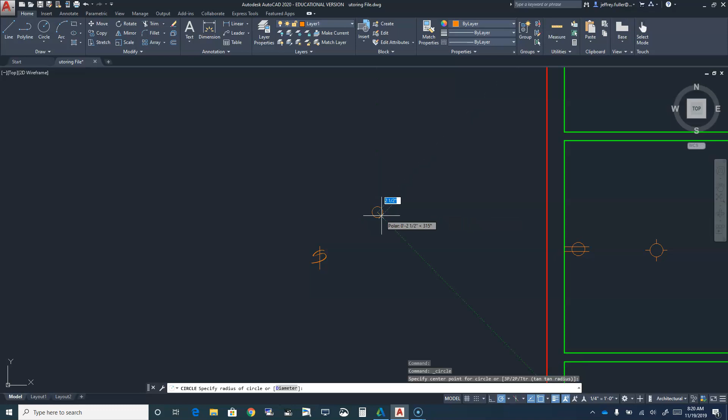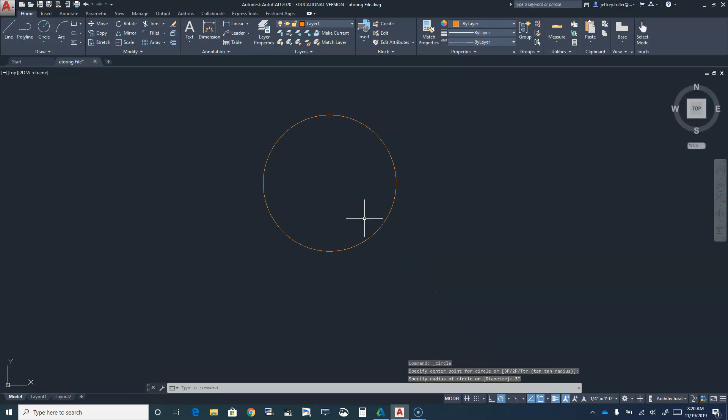So in order to do that, we draw a 6-inch circle in AutoCAD here. If I go to the circle tool and then click somewhere, as I'm drawing it out, let me zoom into it, it's measuring from the center, which means what I'm actually getting measurement-wise is a radius. So in order to make this a 6-inch circle, I just need to enter 3 inches for my radius, and then there's my 6-inch circle.

And then for the lines you see that I've put around this one, to represent just a plain old surface mount light fixture, first off I want to be consistent with the line lengths. I don't want to have some lines longer and some lines shorter.

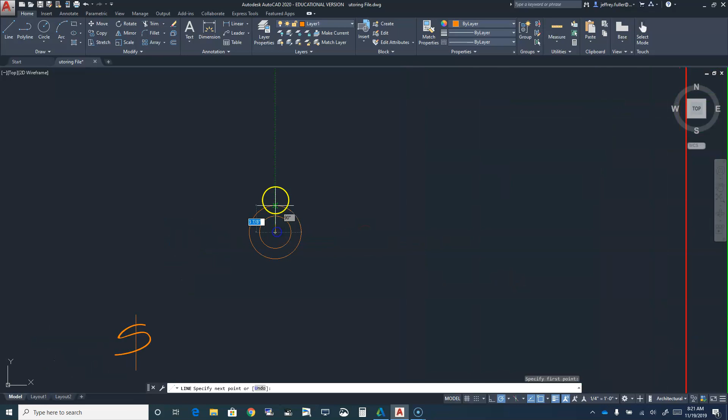So what I'll do is I'll offset this primary circle 2 inches to the outside, just like that. And then I'm going to go to the line tool, and find the center of that circle. I'm just going to draw some lines, and I don't have to draw these any certain length.

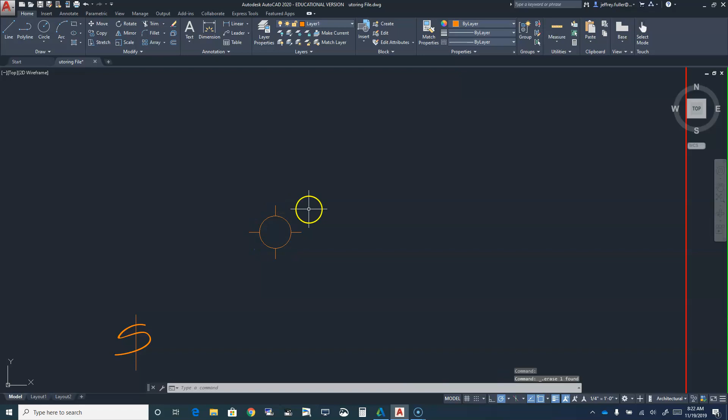Now all I have to do is trim all the excess. So I'll trim out the inside, and then I'll trim out the outsides. And then I'll select this outer circle and delete it. So now I have a light fixture with everything, all the lines are equal. And that's the big thing with these symbols, is consistency across your entire drawing.

Now for the receptacles, I did the same thing. I just created a 6-inch circle, and on this one let's go ahead and make a circle real quick here. So I find the center, and then I draw the lines a little bit longer out one side than the other side, kind of like this. This is probably a little bit too long, but that's okay. Just make sure again that you're consistent with all of your receptacles.

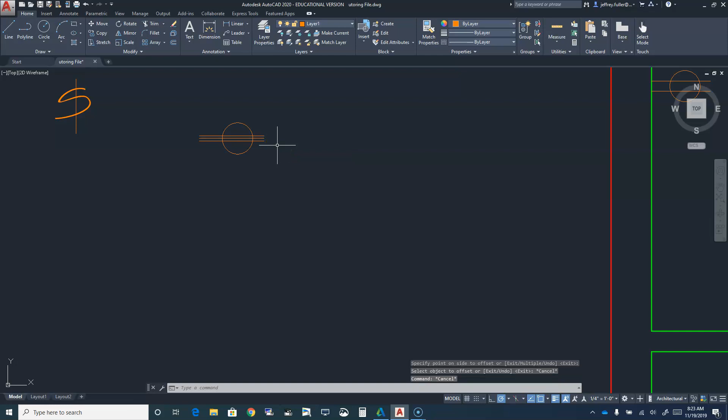Now what I'm going to do is offset this line in both directions. So I'm going to click on offset, and offset it 1/2 inch. And then I'm going to delete the center line. Try that again. And I have a receptacle.

Of course, this one right here, I think I got them a little bit closer than I did on this one. I think I did 1 inch offset on this one, so it might be a little bit better to do 1 inch offset. The thing is, again, it's just consistency across the board.

Alright, the next one is this letter. It's a letter S, it's a light switch, letter S with a line drawn through the middle of it. To create that one, we have to go in and play with our text tool. Watch very carefully as I do this.

So I click on annotation and go here where it says annotative, because I'm going to change my lines or my letters to annotative, and I'm going to click on manage text styles. Now once I'm in here, annotative should be highlighted. If it's not highlighted, go ahead and highlight it again and click set current, to set that as the current text that you're using.

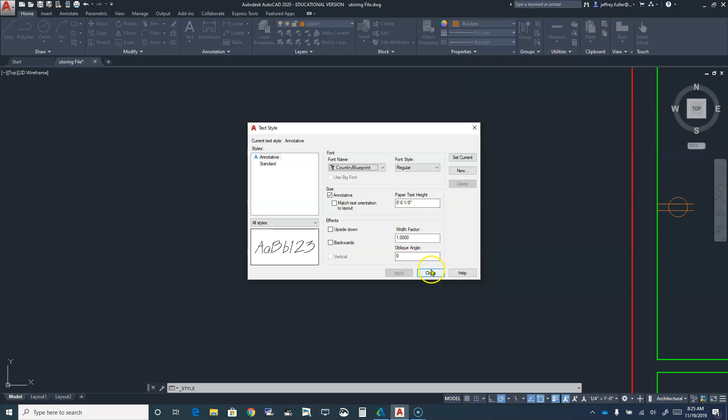And then you're going to go here where it says font, scroll down and look for a font called Country Blueprint. Select that one. Make sure this box is checked, which it should be already. And then your paper text height is going to be 1/8 of an inch, so enter 1/8 of an inch there, and then you're done. You can just apply it, it'll ask you to apply it. And then what you do is you create a text box by clicking on the text button.

Okay, once you draw that text box out, you just put an S in it, click outside of the box, and that saves your drawing there.

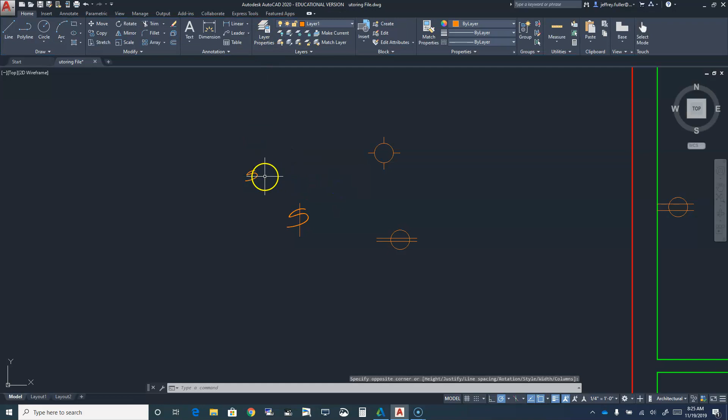I don't know why that one came out a little bit larger for some reason. I'll figure that out. But if you follow the same procedures that I did just now, then we should be okay.

All right, and then I put a line down the middle of it. Okay, didn't stretch that one quite far enough.

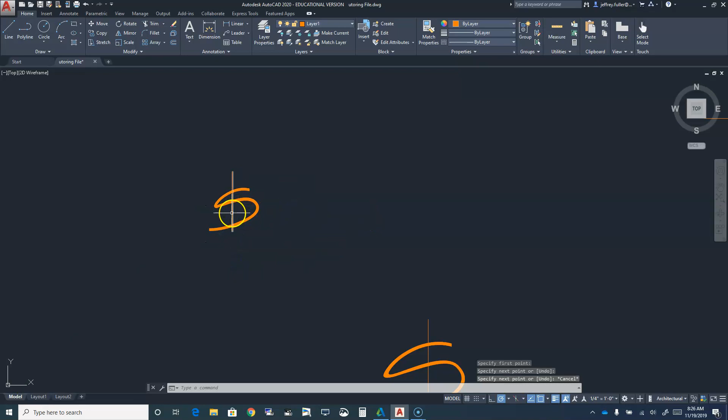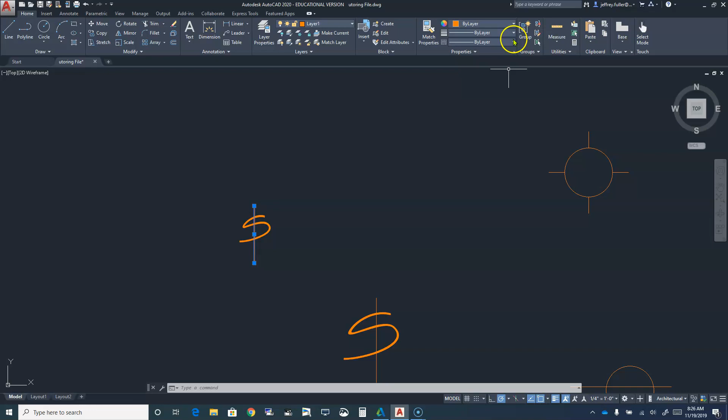Once I put that line, I want to thicken that line up a little bit, because as you see, on both of these the line is kind of thin compared to the letter. So I'm going to click on the line, go up into the properties panel, pull down the menu that governs our line thicknesses, our line weights, and set it for about 0.30 millimeters.

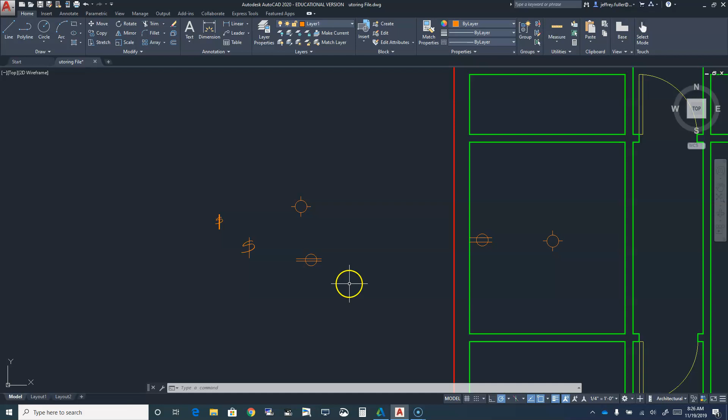Okay, so now I have a light switch. All right, the next thing and the last thing I'm going to show you is how to do a ceiling fan. Now, let me back up just a second.

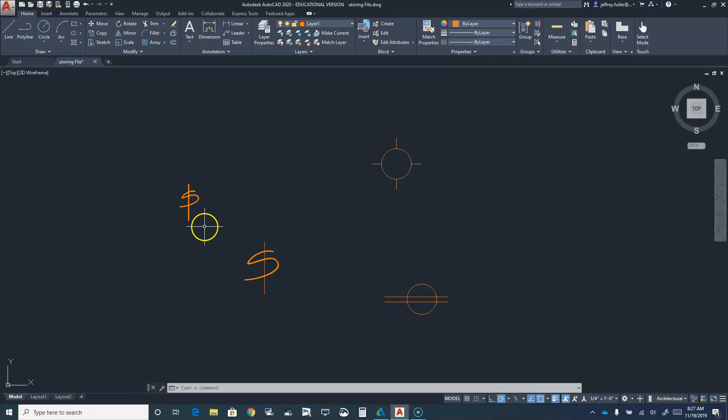Make sure on these light switches and everything, and even your receptacles, that you have the proper annotation down here on the bottom right for certain ones, such as a 3-way light fixture. This symbol alone just represents a single pole switch, but if I put a 3 on here, it will be a 3-way switch. Now with the receptacles, same thing—if you have a GFCI, then GFCI would be written right down through here.

Okay, now about ceiling fans. I'm sure many of you are going to want to put ceiling fans in some of your bedrooms, maybe your living room, or wherever else you might want a ceiling fan. So there's a certain way that I draw ceiling fans.

And this is just a symbol. This isn't an actual representation of the actual ceiling fan that you're going to put in place, but it is a symbol, and I do make it true to the size of the ceiling fan.

If you're unfamiliar with the size of a ceiling fan, you can go on to Lowe's and Home Depot and look at the options that are available, and you'll find that they're available from about 36 inches up to about 52 inches—just off the shelf ceiling fans.

So let's say I want a 48-inch ceiling fan, and of course you can do all of your ceiling fans the same way. It doesn't really matter, you don't really have to get the exact measurement in there, but that's just one of the things I do. Let's say I'm going to do a 48-inch ceiling fan.

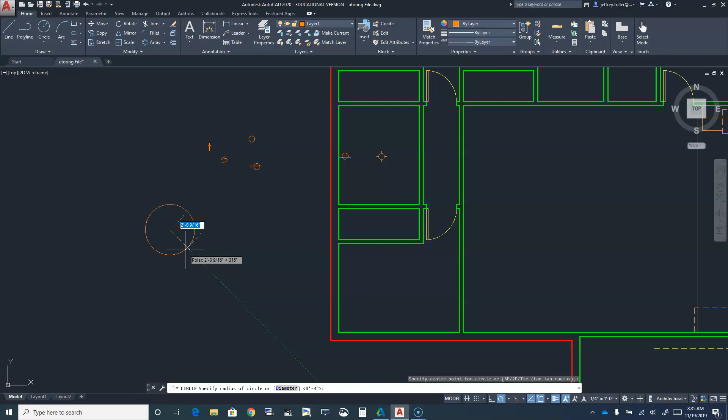First thing I'm going to do is make a circle, stretch it out, and again my circle is being measured by radius. So if I want a 48-inch diameter ceiling fan, I'm going to enter 24 inches, which is half of 48 inches.

All right, and then I'm going to draw a line from the center. I'm going to hover over the circle to find the center, and then just draw a line to the end. Then I'm going to go to the array tool. Right up here is an array tool, it's in the modify panel, and it has different options: rectangular, path, and polar.

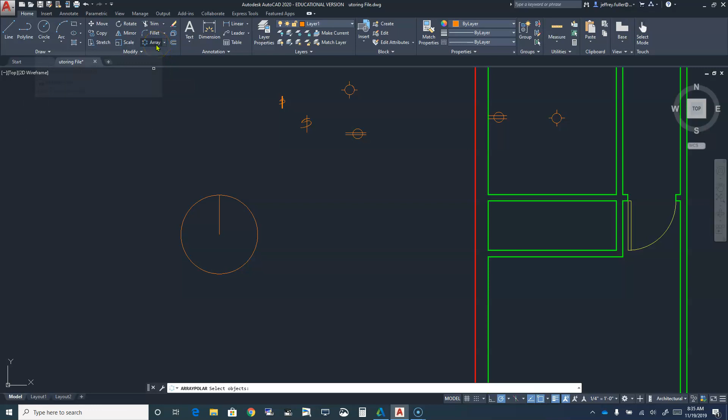Yours might be at rectangular, so all you have to do is click on the drop down and click on polar array. I'm going to select the object. Now, as you notice too, look at my cursor—the instructions on what I need to do are written right there in the cursor. So it says to select objects.

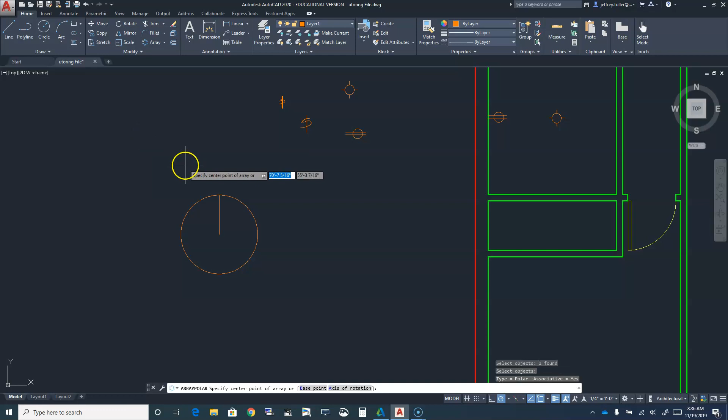So I'm going to select the object I want to array, which is that one, and then I'm going to click the enter button. Then it asks me again in that dynamic input at the cursor to specify the center point.

Okay, and then if you look up here, you get a whole new ribbon of different things that you're able to do. I really just want to have 3 blades, which again isn't representative of the actual fan—that's just the symbol we use, with 3 blades. Enter, give it a second, and then we got 3 blades.

Okay, now what I'm going to do is copy these 3 blades. Or actually, I wonder if I can rotate and copy.

I actually believe there is a way to do that, but I don't remember how to do it, so we're just going to do a regular copy. We'll click on the copy tool, click on the object we want to copy, then click enter. Specify base point, which I'll make right here in the center. Okay, so now I have a copy.

But what I need to do is spin it just a little bit, so now I'll rotate. I'll click on the rotate tool, click on the object, click enter, go to the center of that object, and then rotate it just a little bit. About right there is good. And then I'm going to move it back on top of the original.

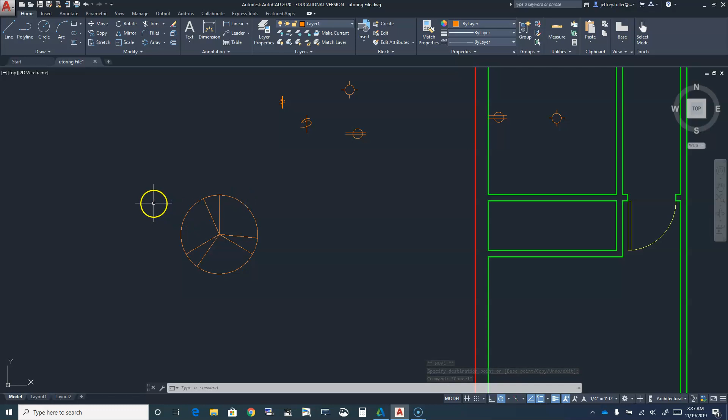All right, now I can start doing, well actually I need to make one more circle in the center. So I'm going to click on the circle tool again, go to the center, and make this one, let's say probably about an 8-inch circle, so I'll type 4 inches.

Okay, and now I'm going to trim. Let's see, do I want to trim the center? Yeah, I want to trim the center now. So I'll go to the trim tool. Oh actually, I forgot one thing.

Now we can do what's called explode, so we can explode our drawing. Right now these blades are as one unit. As you see, as I hover over them, the whole thing lights up. So I want to select both of these units, and then go up to the modify panel again. There's an icon right here, it looks like a box coming apart, and it's explode. So I click on that, and that turns these into individual units.

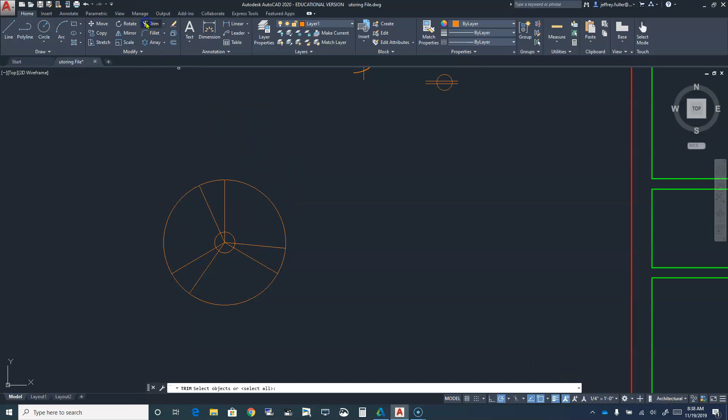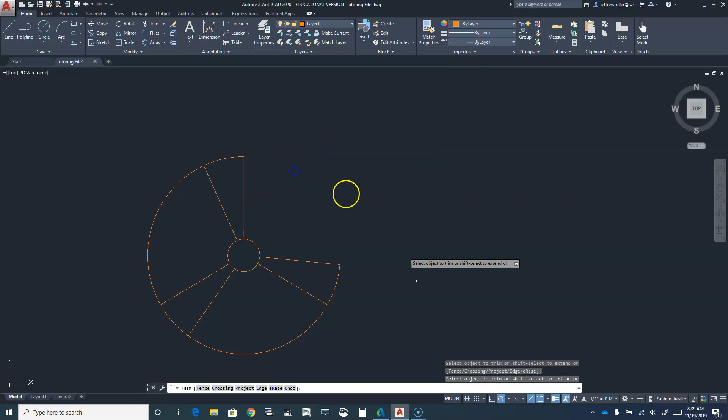Okay, so now I can trim them. So I trim. I didn't do that right. Try that again: trim, select all, and then I can trim. Okay, and I can also trim the parts of the circle out that I don't need. And now I have a ceiling fan with 3 blades.

I can also make this look a little better if I go to my fillet tool. I click on my fillet tool, and I look down here in the command line, and it gives me some options. I can click on the word radius, or I can just click the R button while sitting right here in the screen, then enter, and it enters the radius mode. I've already got a 2-inch radius, but actually I want to drop that down to a 1-inch radius.

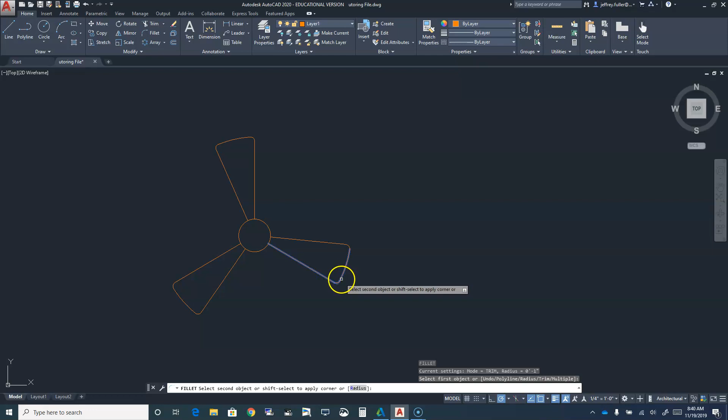And then I'm going to go around creating radiuses on all these corners. So I click here, click there, hit the enter button, click here, click there, hit the enter button, click here, click there. Just keep hitting the enter button between each set of fillets that you do. Okay, now we have a ceiling fan.

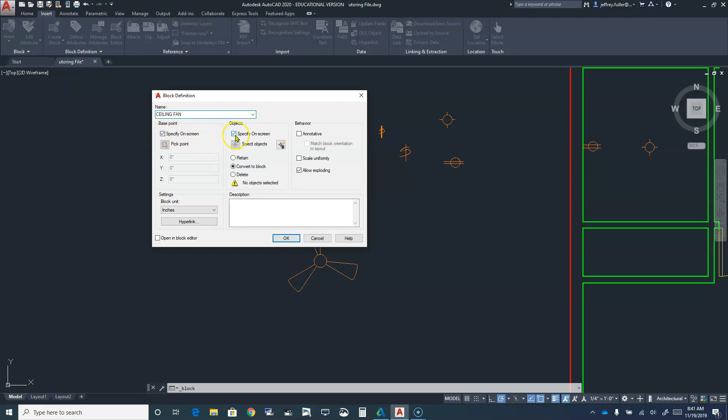So what I'm going to do with this ceiling fan, and this is what you want to do with all of your objects, is create blocks out of them so they're all one entity. So the ceiling fan I just created, I'm going to go to Insert, Block, create block, ceiling fan, and make sure these two block boxes are checked.

Okay, and my dynamic input says specify the insertion base point. Okay, so I did that. Now it tells me to select object. I've done that, and then I hit the enter button. And now the ceiling fan is all one object.

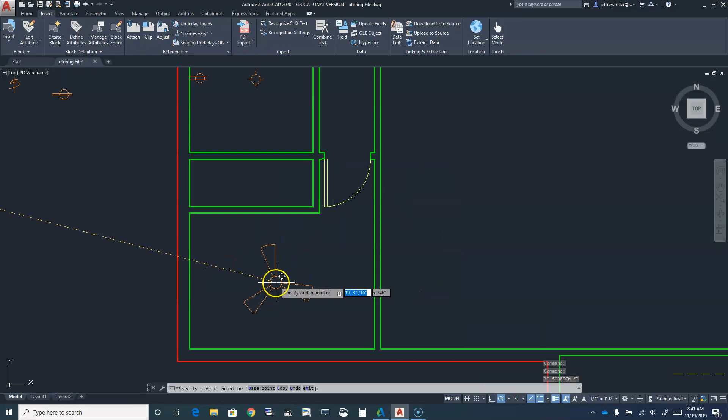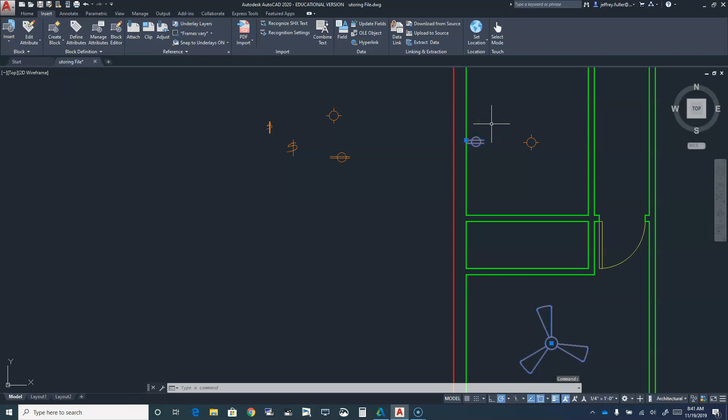Okay, so I can put ceiling fans in my bedrooms. Now if I want to place another one, I can either copy that one, or go right here and you'll see I have my ceiling fan. I did these earlier. But again, make sure you turn all of them into blocks so they're not all just separate little lines that you have to drag around. There'll be one entity right here that you can use. You can copy it, move it, do all kinds of things with it.

Okay, but we'll just copy this ceiling fan, and we will move it into these different locations. Get them all lined up nice and neat. Actually this one's going to be offline a little bit, and you might want one in the living room as well. Okay, so those will be ceiling fans.

Now ceiling fans a lot of times will have lights on them. We'll get around to that when it comes to annotation. So in CAD you would actually annotate, you'd put a note there, or actually it would be in your lighting schedule as well. So that's it, have a good time doing that.